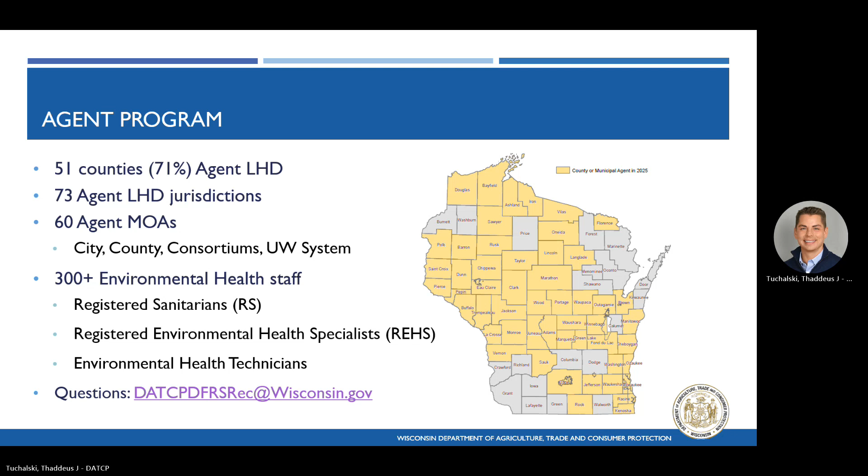For this module, we'll focus specifically on the plumbing-related requirements contained in Subchapter 5. We'll review key requirements related to safe drinking water, proper plumbing design and maintenance, and the collection and disposal of wastewater. These systems play a critical role in protecting guest health and preventing contamination.

Potable water must be safe, sanitary, and supplied in a manner that protects against contamination. This includes water used for drinking, food preparation, and bathing. We'll review requirements related to approved water sources, system operation and maintenance, and protections such as cross-connection control and backflow prevention. We'll also discuss monitoring and response expectations when water quality concerns arise.

Potable water, meaning water used for drinking, food preparation, hand washing, bathing, or other sanitary purposes, must be supplied from either a public water system or private water system. Most lodging facilities, particularly larger hotels and motels, are connected to a public water system. This is typically a municipal community system, or in some cases, a transient non-community system, which is one that serves at least 25 people on 60 or more days per year, or it may be an other than municipal community system that serves at least 25 non-transient people.

Public water systems are routinely monitored and tested by the Wisconsin Department of Natural Resources or by delegated local health departments. Smaller facilities or those located in more rural areas may instead rely on a private water system, more commonly a private well located on the premises. These systems serve a smaller population than a public system. While private well construction is regulated by the Wisconsin Department of Natural Resources, ongoing maintenance and water quality monitoring are the responsibility of the well owner or operator.

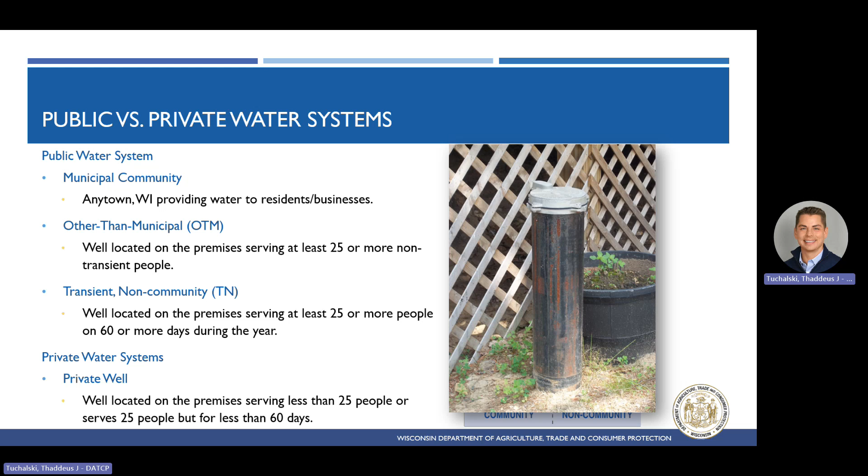In some situations, a private well may be shared by 2 or more properties. In those cases, operators may be required to provide a signed shared well agreement. This agreement outlines the well's location and clearly identifies the parties responsible for maintenance and operation. These agreements are often recorded with the County Register of Deeds office.

There are 2 key contaminants that private wells serving lodging facilities must be tested for on an annual basis: bacteria and nitrate. Coliform bacteria are a group of commonly occurring bacteria found in the environment and are used as an indicator organism to determine whether a water system may be contaminated. If a water sample tests positive for total coliform bacteria, follow-up testing is conducted for E. coli. E. coli is a harmful pathogen that can cause serious illness, particularly in young children, older adults, and individuals with weakened immune systems.

Nitrates are compounds that naturally occur in soil and may also enter groundwater through fertilizers and other organic sources. Elevated nitrate levels are those exceeding 10 milligrams per liter or ppm and can pose significant health risks, especially for infants and pregnant individuals, and have been linked to certain thyroid conditions and cancers. Both bacteria and nitrate testing are required annually for private water systems serving lodging facilities.

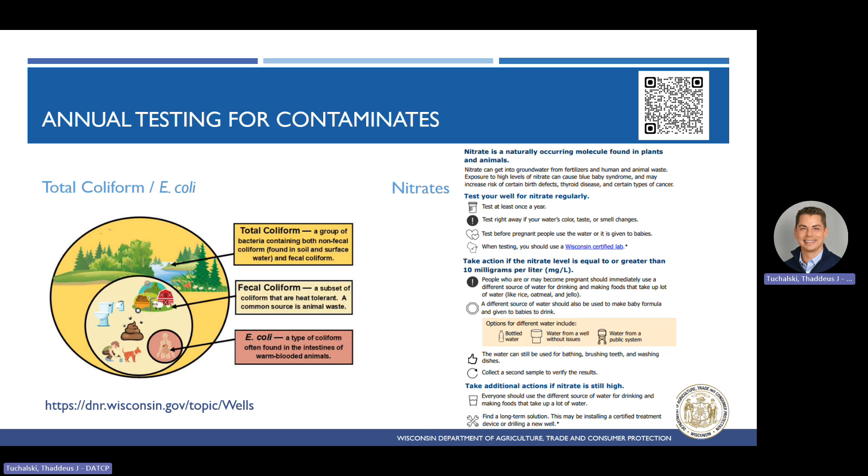Resources for private well owners are available through the Wisconsin Department of Natural Resources. These resources can be accessed by scanning the QR code on this slide or by visiting dnr.wisconsin.gov/topic/wells. The DNR website provides information on certified laboratories, proper water sample collection technique, information on how to read your private well lab report, and recommended actions if a water sample tests positive for contamination.

If a private well tests positive for coliform, E. coli, or nitrate, ATCP 72.16(2)(h) outlines the required actions to protect guest health. If total coliform bacteria are present on 3 consecutive well water tests, the water system may not be used for drinking water. If nitrate levels exceed 10 milligrams per liter or ppm on any well water test, the water system may not be used for drinking water or food preparation.

In these situations, operators must provide an alternative potable water source. This may include commercially sealed bottled water or water supplied through a licensed water distribution service. If E. coli is detected on any well water test, the private water system must be taken out of service immediately. The presence of E. coli is considered an imminent health hazard, and the affected areas, individually keyed unit, or lodging facility may be closed until the contamination is corrected and safe water service is restored.

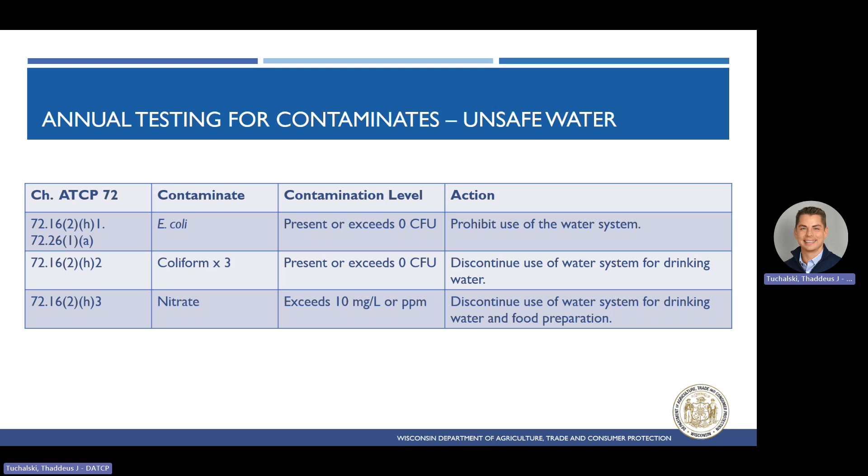Plumbing systems must be designed, installed, and maintained to ensure the safe distribution of potable water and the effective removal of wastewater. We'll review key requirements related to system maintenance, protection from cross connections, and adequate water temperature and pressure. Facilities must be provided with a potable water source under adequate pressure to ensure fixtures function as intended.

Hot water must be available at all hand washing and bathing fixtures to support proper hygiene and sanitation. Plumbing fixtures must be maintained in good repair and kept in a clean and sanitary condition. This includes promptly addressing leaks, broken fixtures, or other conditions that could impact guest health or safety. Finally, all water-carried waste fixtures must discharge properly to approved wastewater systems.

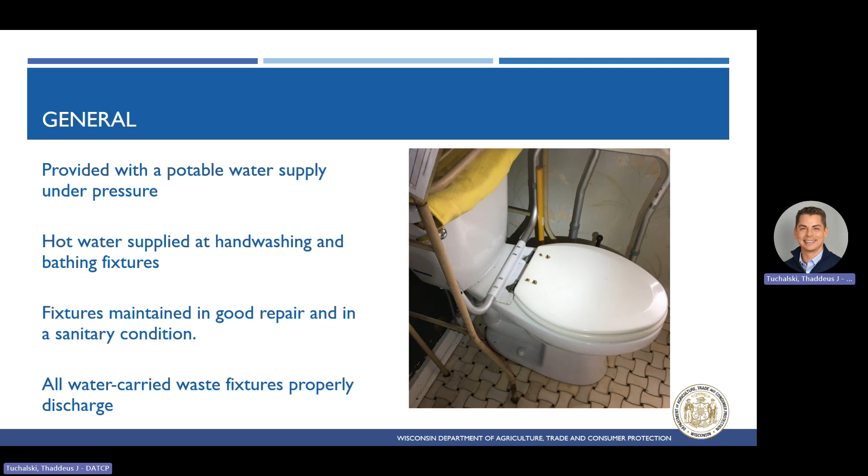Each individually keyed unit must be equipped with, at a minimum, 1 toilet, 1 sink located in or adjacent to the toilet room, and a shower or bathtub. In addition to these plumbing fixtures, the toilet room must be supplied with soap, toilet paper, a means for drying hands, and a waste receptacle. Soap may be provided as a single-use prepackaged product issued for each guest stay, or through refillable or reusable soap dispensers provided they are properly maintained.

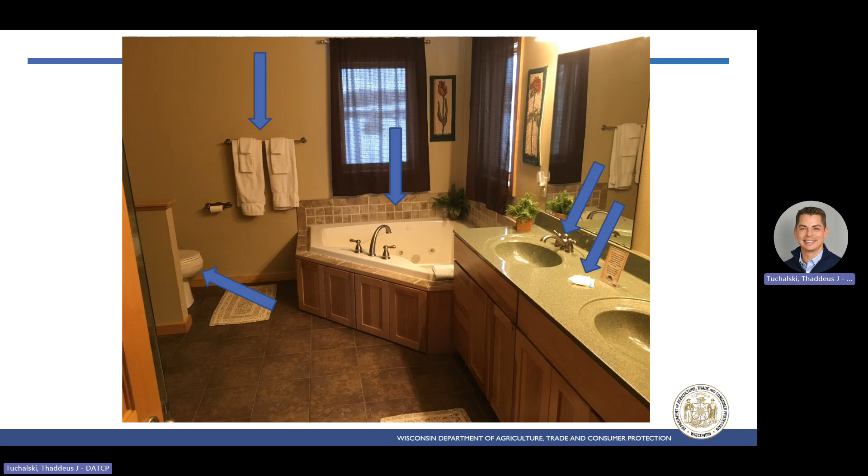Operators of water-jetted fill and drain bathtubs must be able to demonstrate knowledge or describe their cleaning and sanitation procedures. These tubs present unique challenges because water can remain in the piping between uses. If not properly addressed, the retained water can allow bacteria to grow within the system, potentially causing illness. Manufacturers provide specific cleaning and maintenance instructions for their products, and those instructions should be followed.

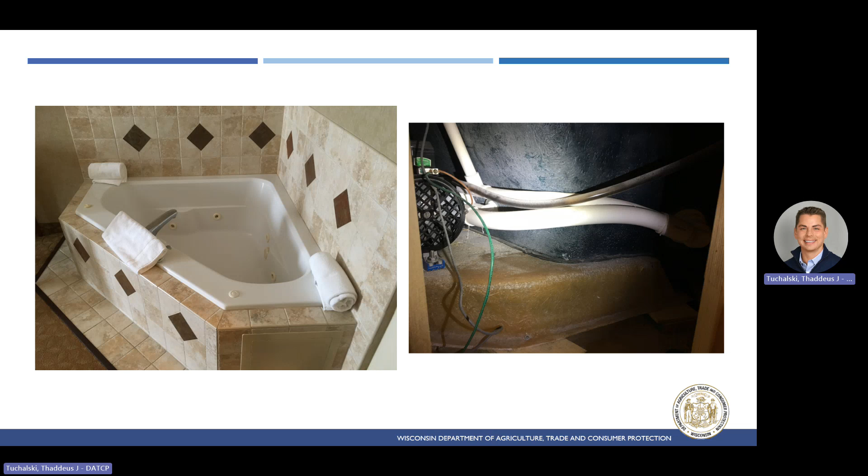In general, best practices include filling the tub with water above the highest jet, adding an appropriate detergent, and circulating that water through the system for a designated period of time. The tub is then drained, refilled with clean water, and the sanitizer solution is added. The jets are activated again to circulate the sanitizer, after which the tub is drained, rinsed, and cleaned.

Both bathtubs and showers are required to be provided with slip-resistant flooring. Slip-resistant flooring may be achieved through a variety of methods, including a textured tub or shower surface, grouted floor tile, non-slip mats, or an anti-slip tape product. Whichever method is used, it must be maintained in good condition to effectively reduce the risk of slips and falls.

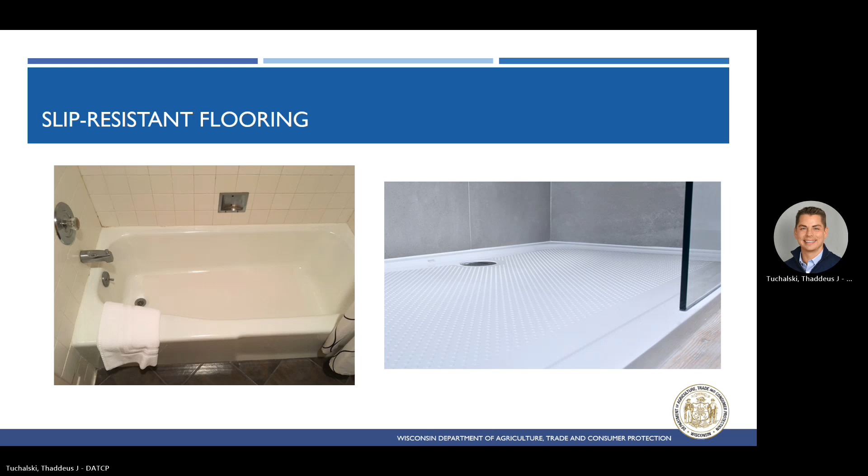Backflow prevention devices are used to prevent contaminated water from flowing upstream or back siphoning into the potable water supply. Approved backflow prevention devices will be labeled or stamped with an American Society of Sanitary Engineering, or ASSE, rating. Examples of common backflow devices encountered in a lodging facility include a mop sink or janitor sink vacuum breaker spout with an ASSE 1001 rating. A hose bib vacuum breaker with an ASSE 1011 rating is also common and is typically threaded onto standard utility faucets used for hoses.

Chemical dispensing systems often found in housekeeping or laundry areas require an ASSE 1055 rated backflow prevention device. And lastly, frost-free outdoor faucets are equipped with an ASSE 1019 backflow prevention and are most commonly found on the exterior of a tourist rooming house.

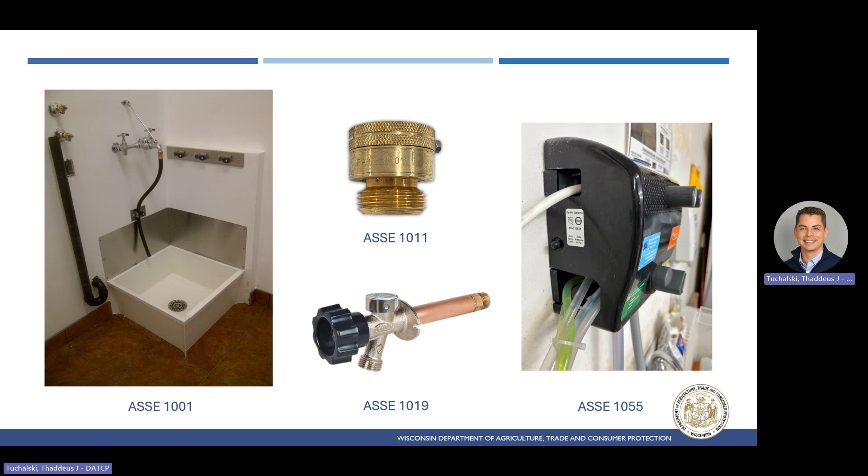One of the most common backflow issues identified in a lodging facility involves the drain line of a commercial ice machine. In many cases, the ice machine drain line is improperly inserted into the floor drain and is in direct contact with the drain or positioned below the flood rim. This creates a potential backflow and contamination risk. To prevent this, an approved air gap is required, as illustrated on the right side of the screen.

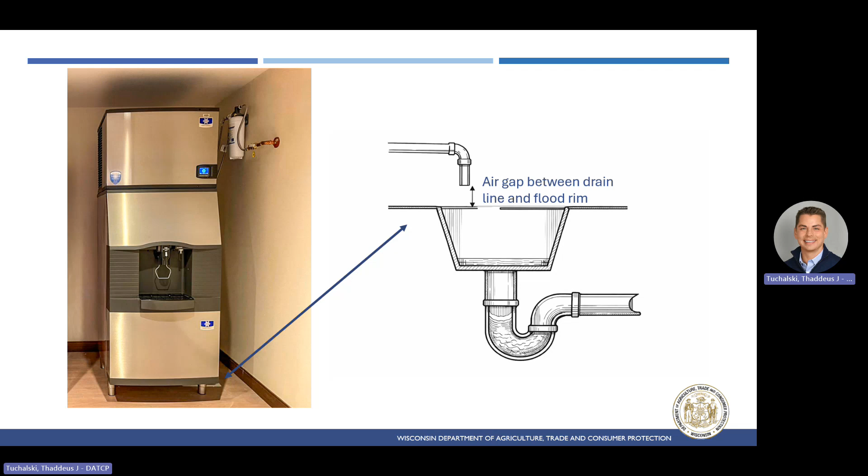An air gap is a physical separation between the end of the drain pipe and the flood rim of the receiving drain. If the waste pipe is 1 inch or less in diameter, then the air gap needs to be at least twice the diameter of the waste pipe. If the waste pipe is larger than 1 inch in diameter, then the air gap needs to be at least 2 inches.

This section addresses wastewater systems in lodging facilities. Wastewater systems must be designed, installed, and maintained to safely collect and dispose of wastewater generated from plumbing fixtures. This includes sinks, toilets, showers, bathtubs, and other water-carried waste fixtures. As previously stated, all water-carried fixtures, to include sinks, toilets, appliances, and showers and bathtubs, must discharge properly into an approved wastewater system. These fixtures must be connected either to a private on-site wastewater treatment system, more commonly known as a POWTS or septic system, or to a municipal sanitary sewer.

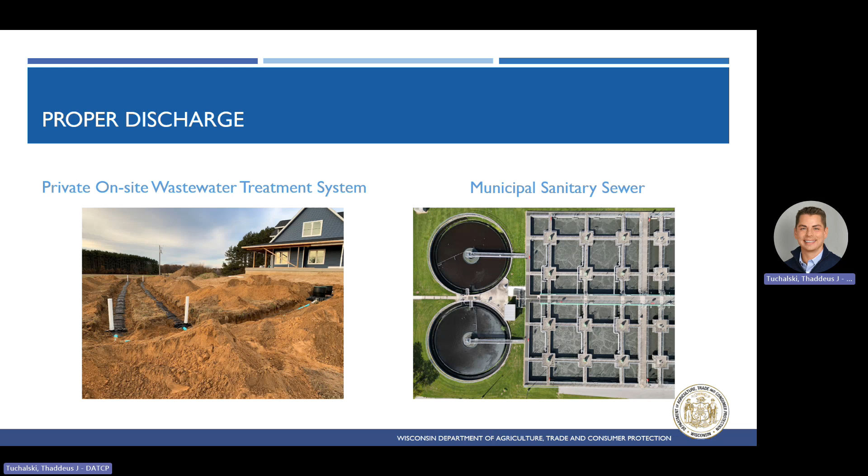Alternatives to water-carried waste plumbing fixtures, such as portable toilets, composting toilets, incinerating toilets, or privies, need to comply with the Wisconsin Department of Safety and Professional Services construction standards and may require local government approval before use. For questions regarding allowable wastewater systems or local requirements, operators should contact their local zoning or permitting authority.

When a private on-site wastewater treatment system or POWTS is used, there are several important considerations to keep in mind. Any cleanout covers that are exposed above ground must be secured to prevent unintended access. This is typically accomplished by locking the cover to the concrete riser or by using tamper-resistant fasteners designed for this purpose. Proper maintenance of the POWTS is essential to ensure reliable operation and to extend the life of the system.

Local zoning or permitting authorities oversee inspection and maintenance of these systems. Operators should also be alert for signs of system failure, including ponding on the ground near the tank or drain field, discharge of sewage to surface water, or sewage backing up into the building. If any of these conditions are observed, the local zoning or permitting authority should be contacted promptly.

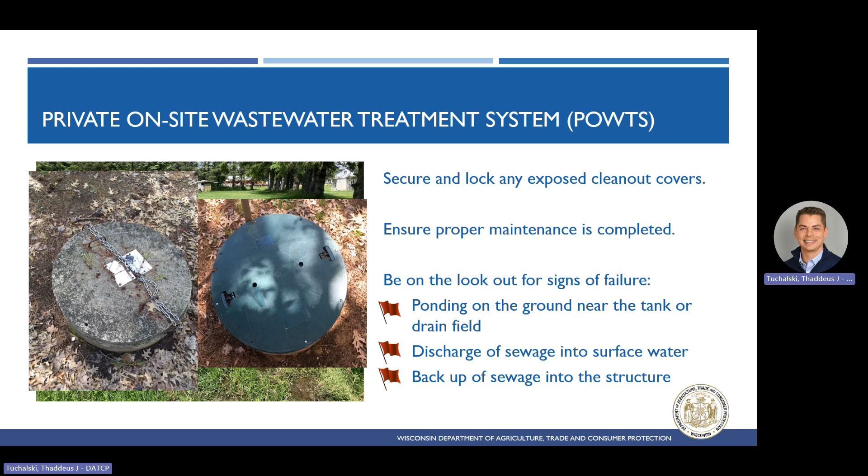Waterborne disease outbreaks can be caused by a variety of infectious agents, including Legionella, Pseudomonas, Campylobacter, Cryptosporidium, E. coli, and Giardia. A waterborne disease outbreak is defined as 2 or more people that experience a similar illness after exposure, ingestion, or inhalation of water that epidemiological evidence implicates as the probable source of the illness or meets other exposure criteria for that specific disease. Understanding how these outbreaks occur highlights the importance of properly designed, maintained, and monitored water systems in lodging facilities to protect guest health.

The most common waterborne disease outbreak investigated in lodging settings involves Legionella pneumophila. Legionella pneumophila serogroup 1 is the strain most frequently associated with Legionnaires' disease. Legionnaires' disease is a severe form of pneumonia that can result in a serious illness and in some cases death, especially among older adults, current and former smokers, and individuals with weakened immune systems.

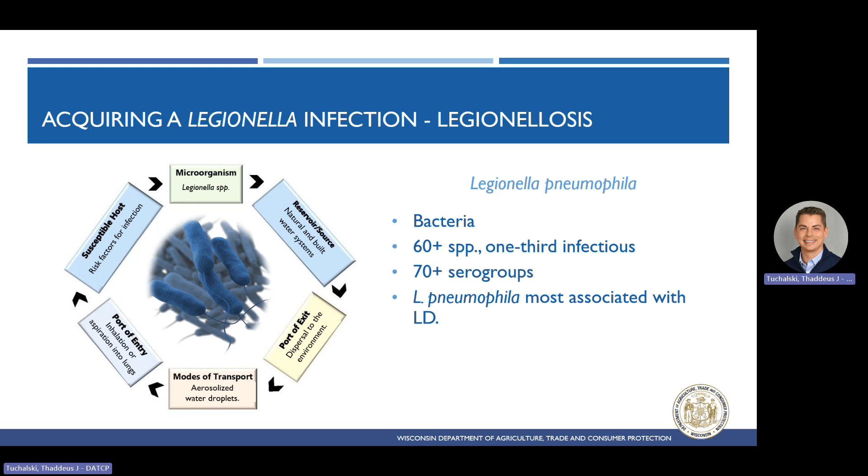Legionella bacteria naturally occur in freshwater environments but can enter and become established within the building water systems. Once introduced into the built environment, Legionella can take up residence in the potable plumbing system, in whirlpools and hot tubs, and also in decorative water fountains or cooling towers. These systems can create conditions such as warm water temperatures or stagnant water that allow the bacteria to grow and spread.

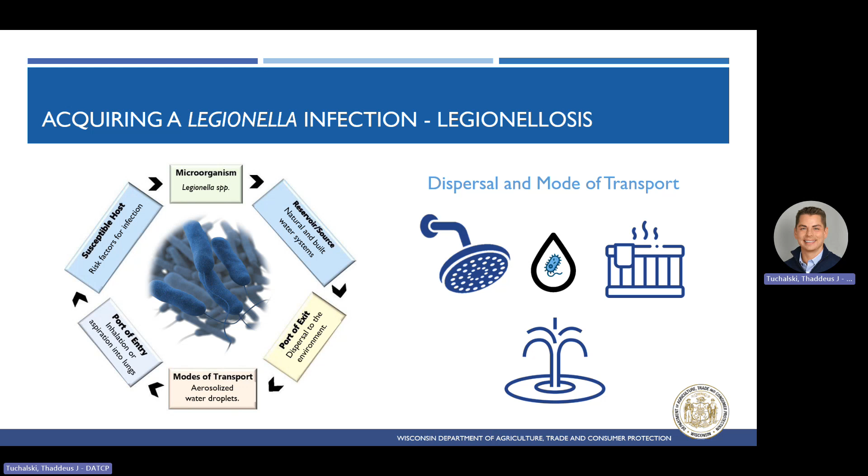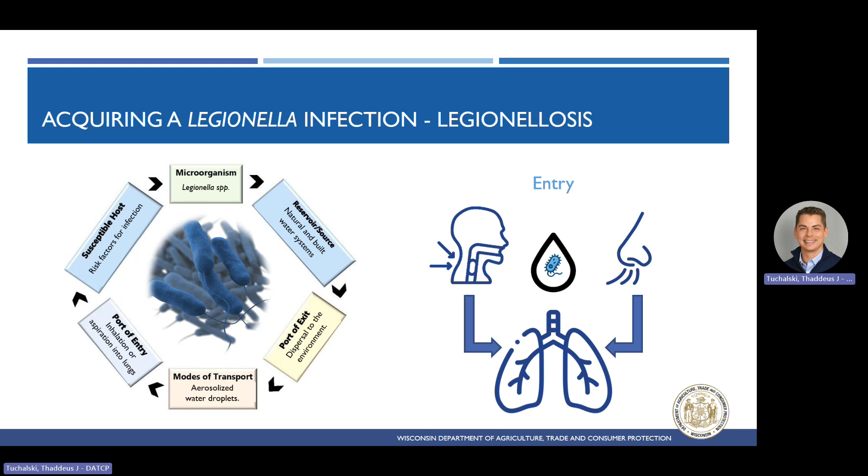Contaminated water is then aerosolized by plumbing fixtures, such as the potable water system shower heads, whirlpool or spa jets, cooling towers, or decorative fountain spray features. These fixtures can produce fine water droplets that allow Legionella bacteria to be carried into the air and inhaled by occupants. These contaminated water droplets can then be inhaled into the lungs, allowing that bacteria to enter the respiratory system and cause infection. Depending on the individual and their underlying risk factors, exposure to Legionella can result in either Legionnaires' disease or the less severe illness known as Pontiac fever.

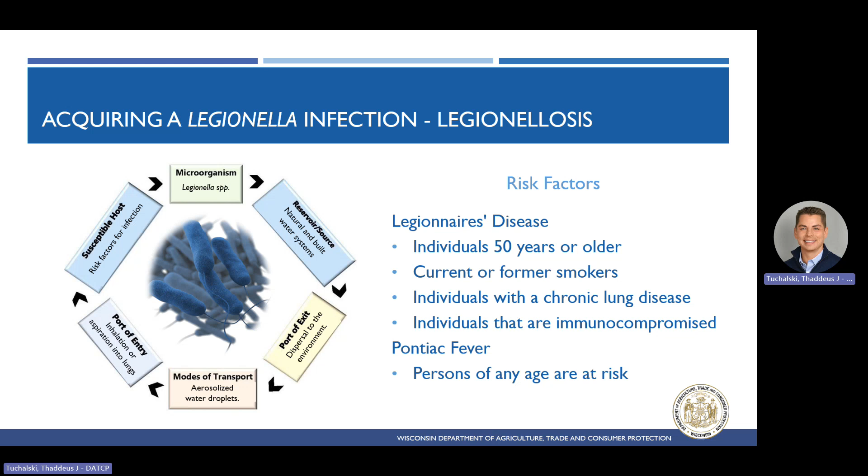A public health outbreak response begins when the Wisconsin Department of Health Services sends notification of a suspected Legionella outbreak involving 2 or more individuals who test positive and share common exposure locations, such as a lodging facility they visited or stayed at. Once notification occurs, public health officials coordinate with the operator to conduct an on-site environmental assessment. This includes a facility walkthrough, collection of water samples, and completion of the U.S. Centers for Disease Control and Prevention environmental assessment form. Areas of focus typically include the potable plumbing system, whirlpools or spas, decorative water features, and cooling towers.

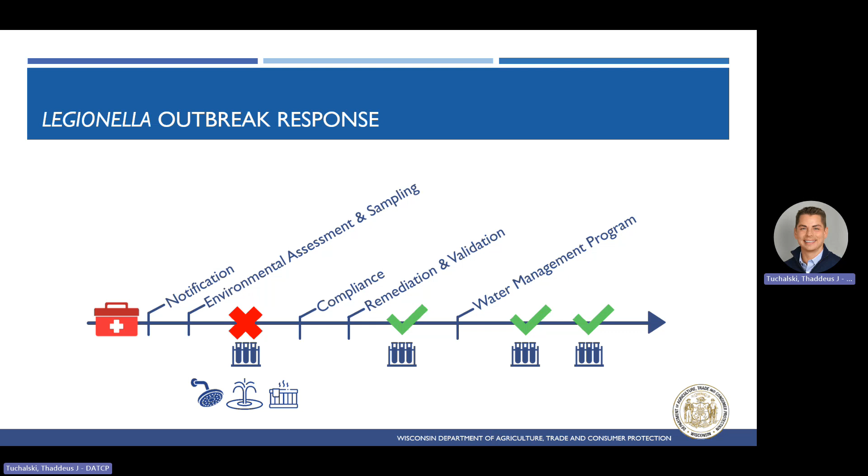If any test results return positive for Legionella species, affected systems or areas may be closed to the public or required to implement interim protective measures, such as point-of-use filtration, to reduce exposure risk. Following remediation, public health officials will resample to confirm that corrective actions were effective. After validation, the operator is responsible for implementing and maintaining a water management program, including ongoing monitoring and periodic testing for Legionella as outlined in that program.

The water management program is a structured step-by-step risk management plan designed to prevent and control Legionella growth within the building's water system. Water management programs are based on nationally recognized guidance such as ASHRAE standards for Legionellosis risk management, and focus on identifying water systems that could support Legionella growth, establishing control measures, monitoring system performance, and responding when conditions fall outside acceptable limits. Implementing a water management program helps facility operators proactively reduce the risk of Legionella exposure and protects building occupants.

The CDC has established procedural steps and a toolkit to assist lodging facility operators in developing a water management program. These resources provide a practical framework for identifying water systems that may support Legionella growth and for implementing control measures to reduce that risk. Operators are strongly encouraged to implement a water management program as a proactive measure to help prevent Legionella outbreaks in their facility. A well-designed program supports routine monitoring, documentation, and corrective actions when conditions fall outside of the acceptable limits.